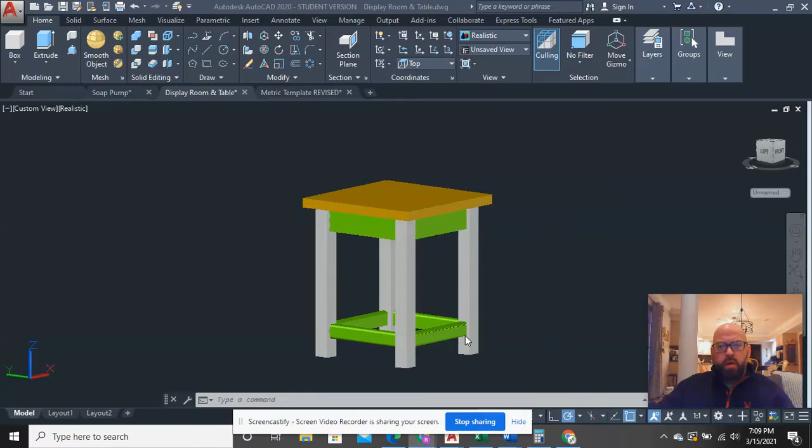So I finished off that table for the most part in the last end of the last video before the dog started barking. But just in case, I wanted to give you guys something to help you possibly with workflow a little bit.

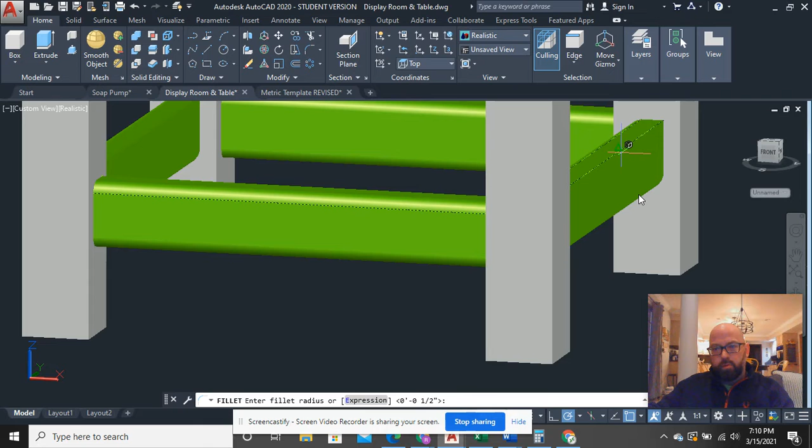Remember that any command you use, if you hit spacebar right after you use it, you can go back and repeat that command. So in this case, I can go spacebar to activate fillet, and then click space, and just go around one at a time.

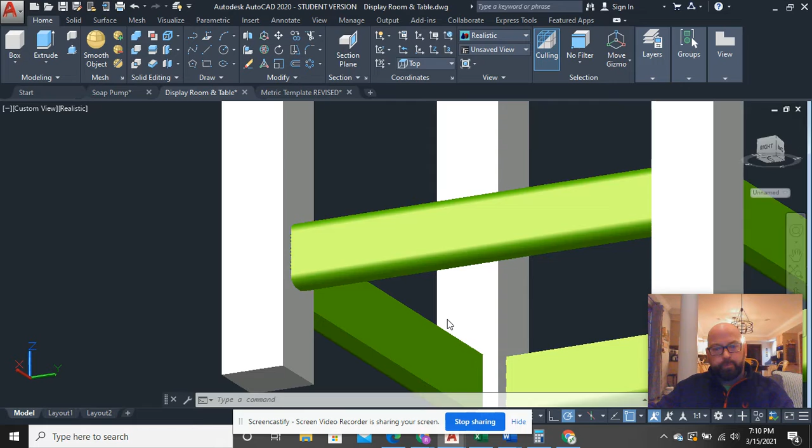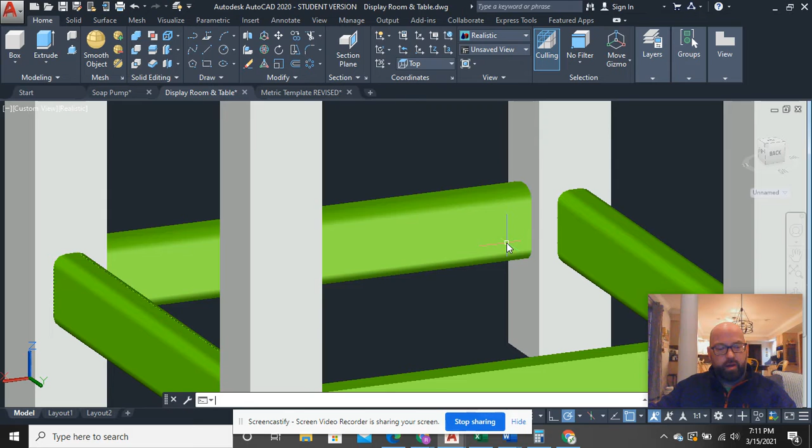So what I was saying before the dog started going nuts was that if I had this to do over again, what I would do would be to simply just cruise around and do one of these, and then I would have just rotated it into place and finished off the rest of them. So you can see over here, it's kind of time consuming to have to really just go around and keep hitting all of these, sort of a complete waste of time.

But in the end, it will look quite a bit better and be quite a bit more realistic.

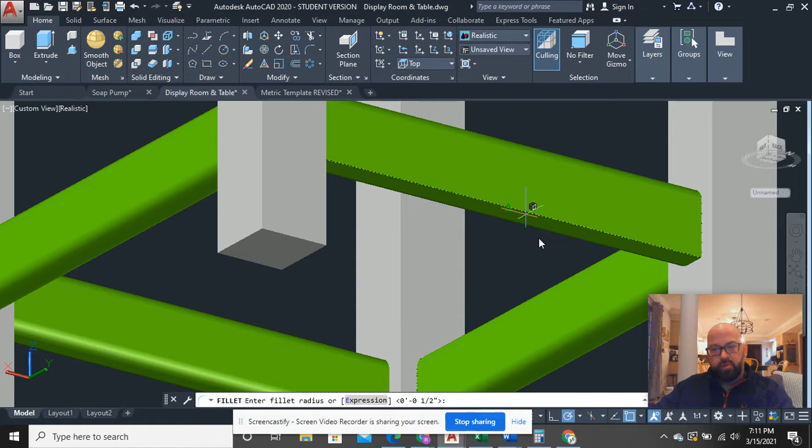So I'm not going to make you suffer through the remainder of filleting all of these edges. But I'm also going to vary this up a little bit, and actually slicing the inside of these legs is something that I kind of had thought about as far as doing like a taper.

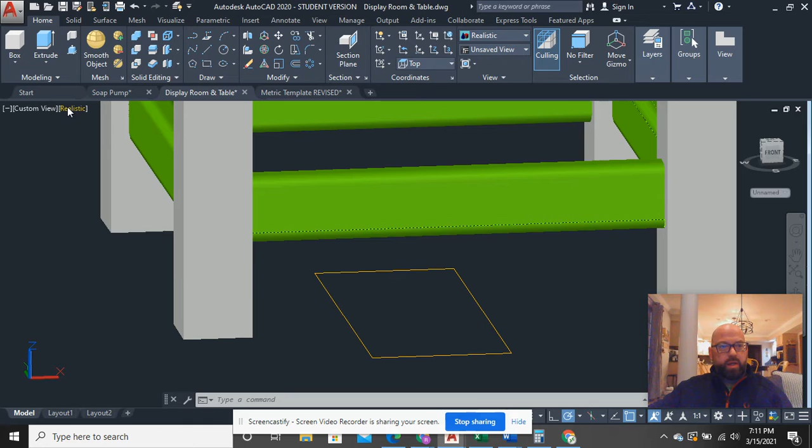This is, I guess, the last thing I'll show you. Let's say I wanted to taper these legs. One easy way to do that would just be to draw a rectangle right on the floor. And this would probably be easier also to do in wireframe.

This would be, again, something that would certainly speed up the process if you were to do it before you built all your legs, rather than having to go back through this process.

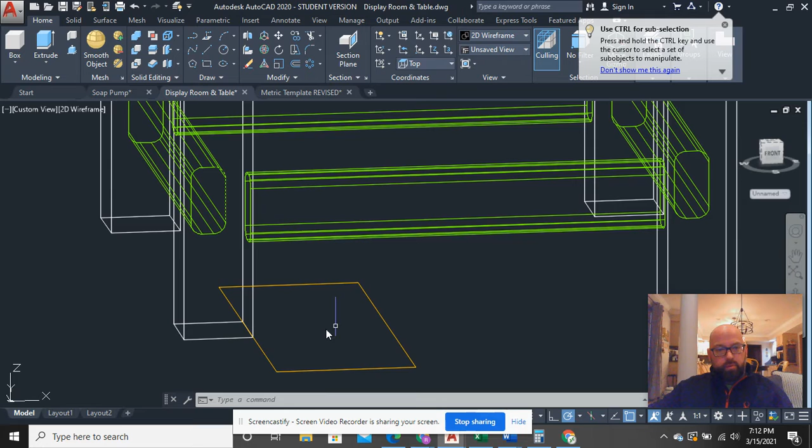But if you were to go ahead and do this and then 3D rotate, I'm going to go ahead and do a 3D rotate right around that midpoint, right around the green hoop here. And I want to bring it up here, so I'm going to say maybe like 70 degrees or so. Something kind of like that.

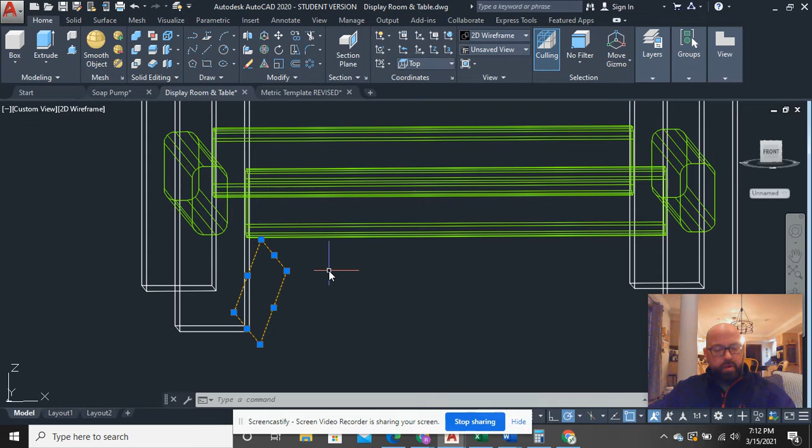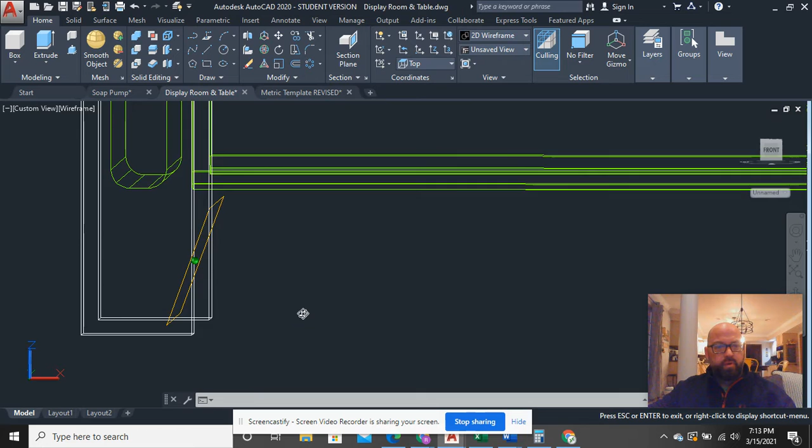Now my rectangle is a little bit big, so if I bring it down to below where that stretcher is on the bottom, and then if I come in here and move it, say, okay, I want to bring it in. How far? I don't know, it's a 3-inch leg. Maybe I want to bring it in 1 inch, kind of follow that rule of thirds. It looks like I've punctured all the way through it.

So in this case, I can go back and use my slice tool and go ahead and slice this leg using this as my planar object, which I just made.

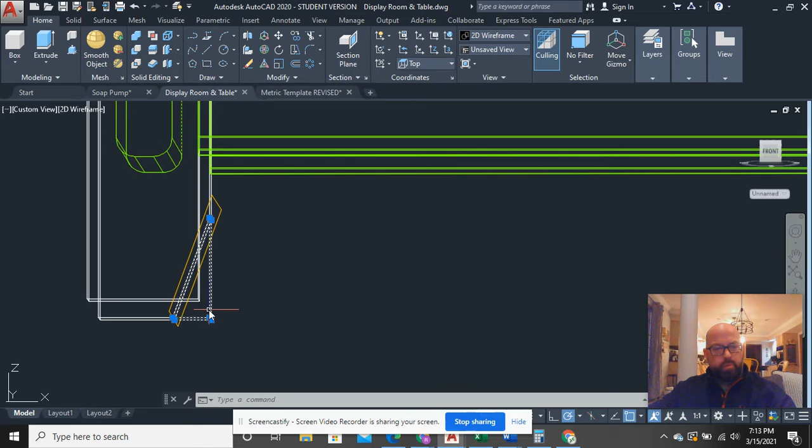And I say keep both sides. I always keep both of them, I don't know why, out of paranoia. Sometimes just out of if I wanted to have like another piece that I could use for something else.

But now at this point, I can look at this and go back to realistic, and that kind of even starts to really make my table have another level of realism to it.

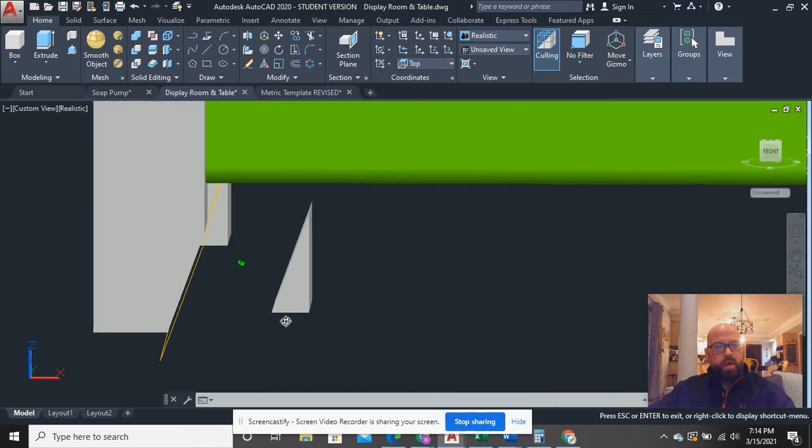So I think what I'm going to do is actually do this, go ahead and taper these legs. At this point, in order to taper this leg, I can literally just go ahead and move this from its midpoint right along the line here to that midpoint.

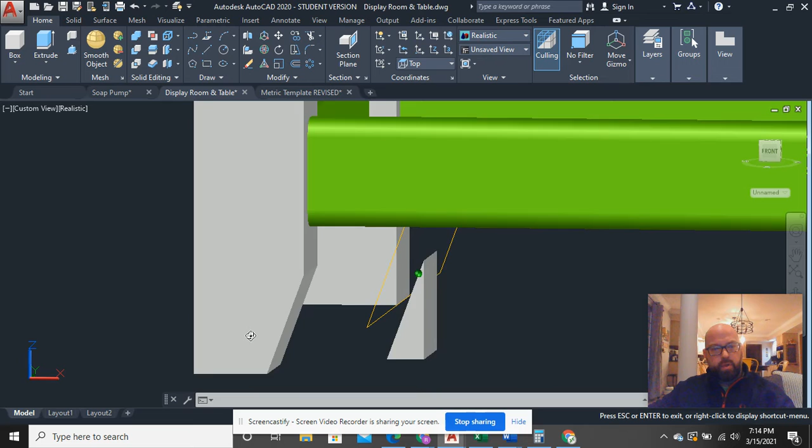And I guess I moved it over a little bit, so that would have been easier to do in wireframe. But if I go back to wireframe, let's see if I can do this quickly.

I'm going to go ahead and move it from here, I'm just going to bring it straight down the line. As long as polar is on, I'm going to select no object snap in this case. So I just want to make sure it's punctured all the way through there.

I can go ahead and slice again. That's the object I want to slice. Right click, I want to use a planar object to slice it. There's my planar object. And keep both sides. If I did it right, I can take that and delete it.

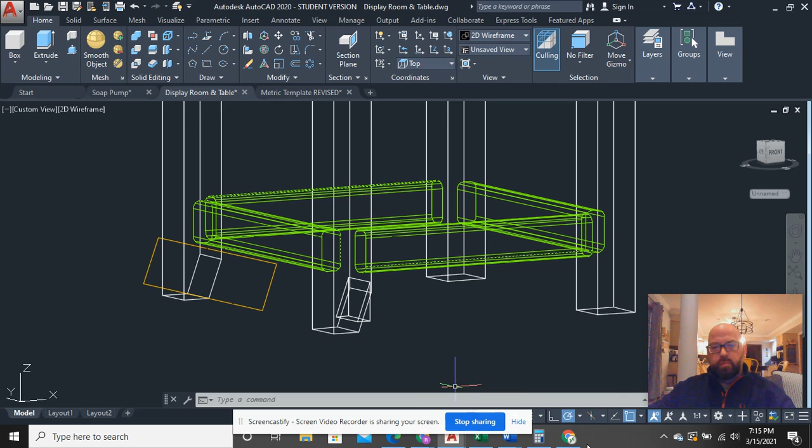That's it. So good luck with yours. I'll finish this up a little bit, and keep in mind, you don't have to stay with the same thing.

So like on my fillets, I made mine 1/2 inch roundovers. I don't need to keep them 1/2 inch roundovers. In fact, I think on the tabletop, I might use a little smaller roundover on the top and a little larger, maybe like 3/4 of an inch on the bottom and 1/4 of an inch on the top.

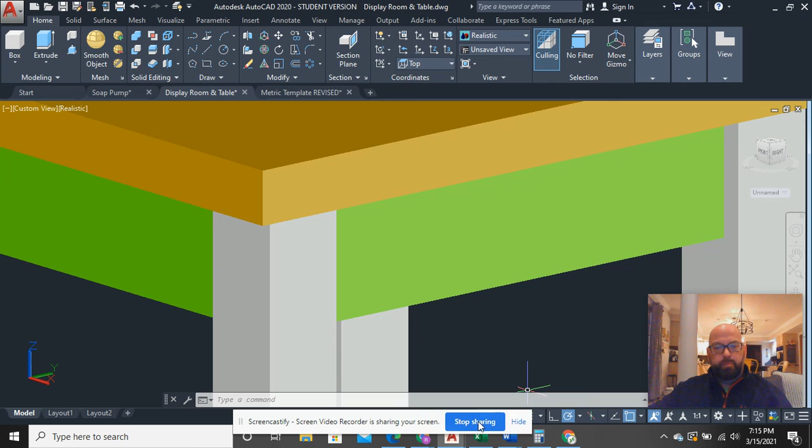All right, so hopefully that helps you, and these things will look dynamite by the time you render them.